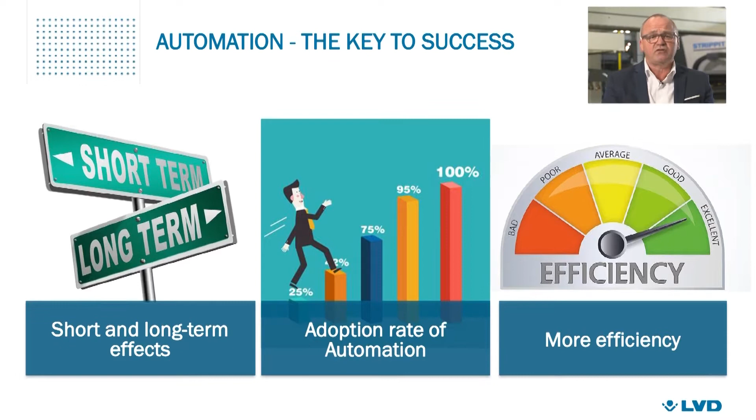Why is flexibility and automation so critical? Let's consider three important points: short and long-term impacts of the corona crisis, and the adoption rate of automation and the need for greater efficiency.

Businesses have been affected by the coronavirus crisis in different ways, with immediate and long-term impacts. The crisis has brought and will continue to bring increasing pressure on stock levels, batch sizes, and delivery times.

Manufacturers will have to more quickly adapt to new and changing circumstances. With some supply chains restricted by lockdowns, companies are pressured to be more flexible in how they operate.

Fabricators will have to quickly increase their capacity in the coming years without hiring more people, adding more equipment, or requiring overtime.

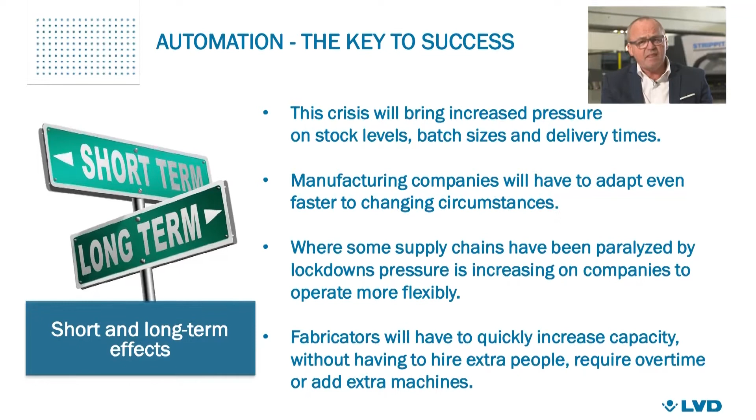Many companies are embracing automation. The crisis has helped to speed up the adoption rate.

38% of entrepreneurs cite automation as a key way to increase the efficiency of machines. Half of metal entrepreneurs agree that automation helps increase flexibility.

Many entrepreneurs, like for example 40% in the Netherlands and 35% in Germany, report that they plan to invest in automation in the future.

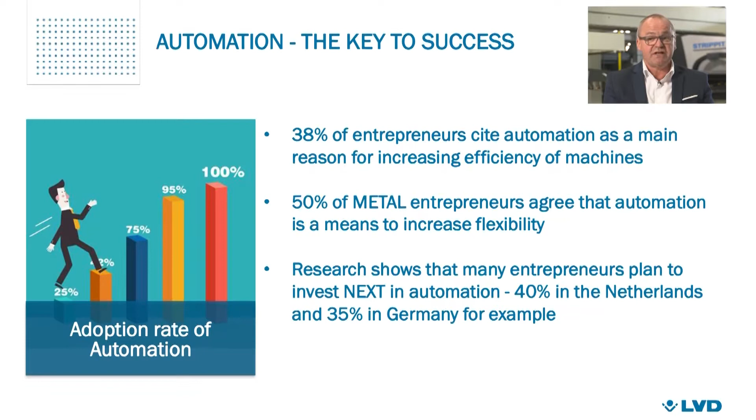Why automate? Automation helps companies get more out of their existing machines without having to invest in new machines and without adding workers.

Automation makes companies more flexible with unmanned production that can quickly be scaled up or down. Automation increases productivity and process flow.

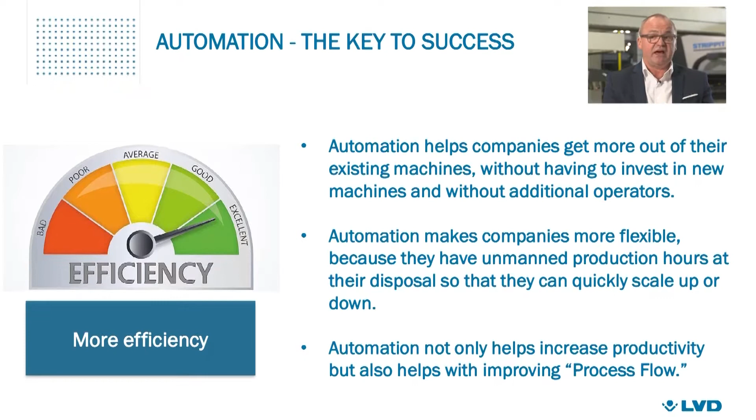How to unlock this key? Manufacturers have to look differently at the layout of their production environment and their process flow. Machine utilization and process flow are equally critical to productivity rates. That's what counts.

Across manufacturing industries and markets, what we have learned is that automation is the key to better process flow and throughput productivity.

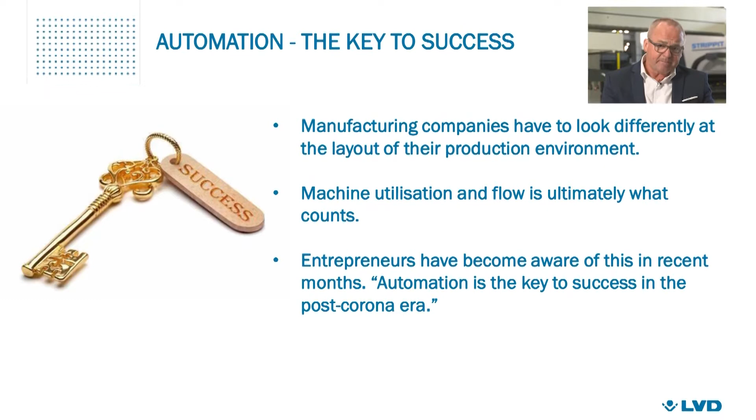Another important factor is how to modernize automation systems and optimize your process flow. It's not just about producing large batches, it's about accelerating your order-to-cash cycle.

Automation reduces the cost per part, and automation also reduces the lead time.

Modern automation systems help optimize process flow in three key ways. The first is they improve the man-machine relationship. The second, they allow you to combine existing and new machines. And the third is they open the door to more creative solutions for manufacturers.

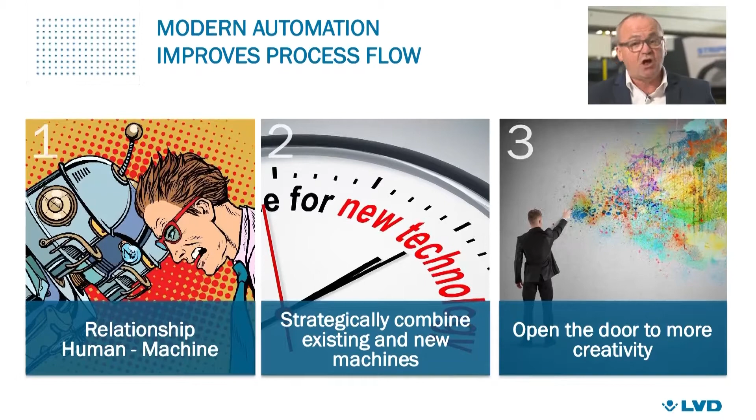The level of automation defines the state-of-the-art factory. Many tasks can be completed without human intervention, reassigning operators to new or different tasks so that they can add more value.

For example, a worker can be retrained to oversee the operation of the system or to monitor the process and make decisions from the data.

Intuitive user interface technology makes this retraining easily possible.

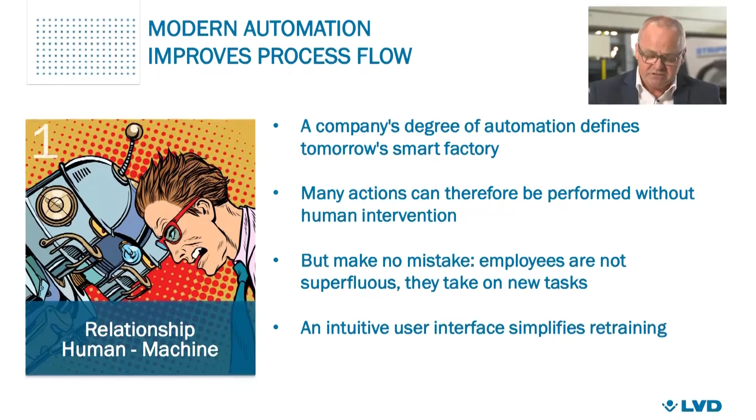Evolving production systems is an important way to create a successful smart factory. Machines that can be expanded and combined in a modular way help you reach a higher level of operation and efficiency.

Modular automation solutions offer enormous flexibility and a guarantee that they will be able to respond to changing requirements.

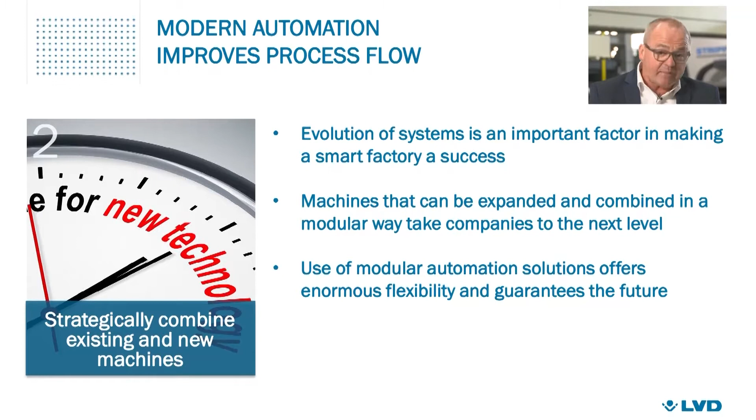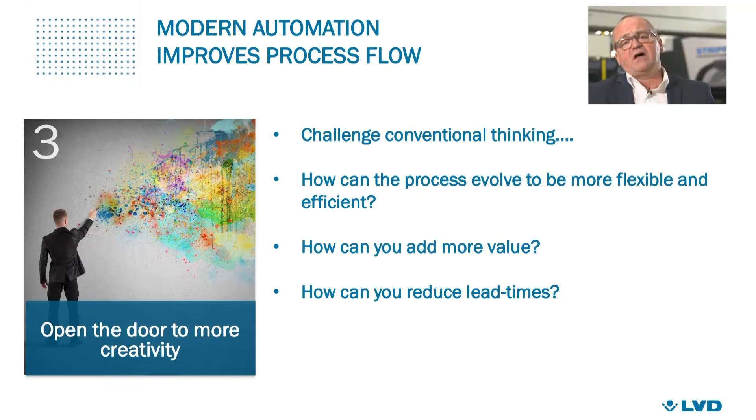Challenge conventional thinking. Three questions: How can the process evolve to be more flexible and efficient? How can you add more value? And how can you reduce lead times?

To succeed with automation, it's all about adding value to the part: punching, forming, tapping, and bending. It's not just about production, it's more about flexible productivity and flow.

How can automation play a part in your company's evolution to remain competitive? Ask yourself, what will your next punch press be able to do?

To realize success with your next punch press, you need to look at 3 things: adding value, flexibility in production, and process flow.

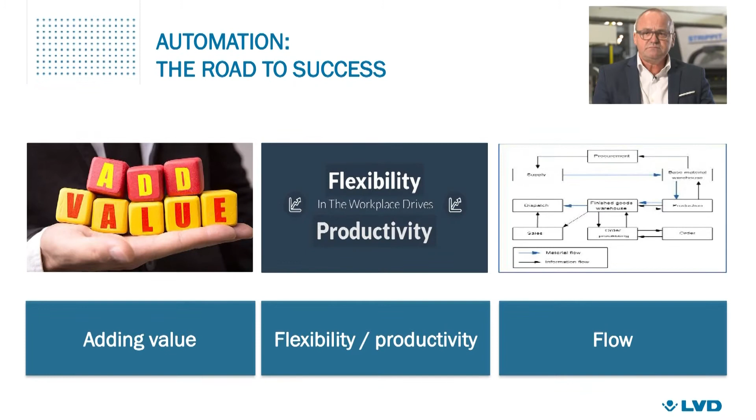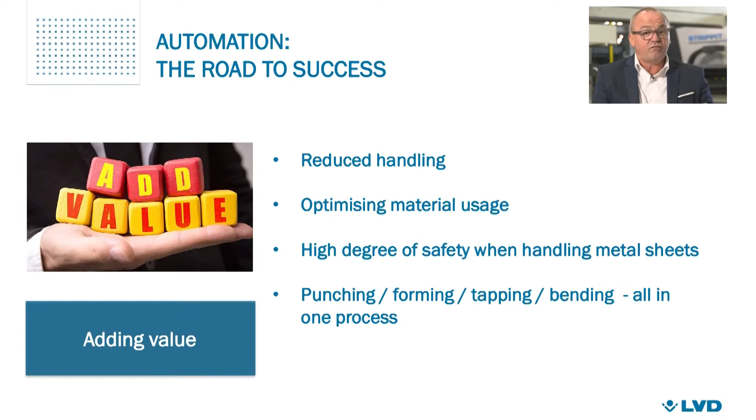Adding value involves reducing material handling, optimizing material usage, making it easy and safe to load and unload material, and having a more capable punching process able to perform multiple operations like punching, forming, tapping, bending, and automation.

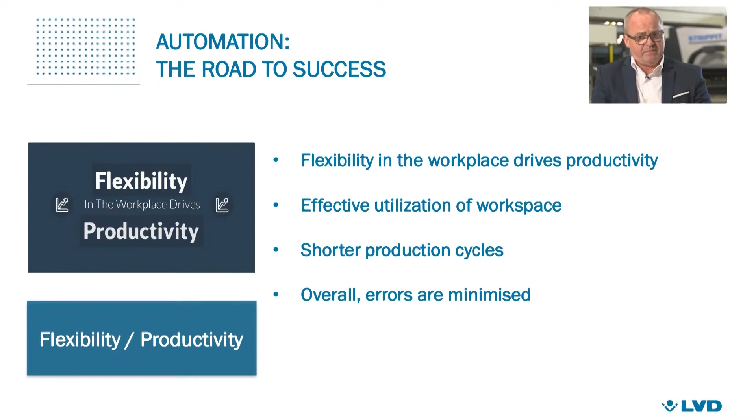A flexible punch press is key because it drives productivity. It reduces lead times and allows you to do more on one machine, so you maximize use of floor space. It reduces production cycle time and minimizes errors.

Process flow is equally important because flexibility of the automation system is key to optimizing the flow. The flow is key to ensuring you can meet delivery times and achieve optimal cost per part.

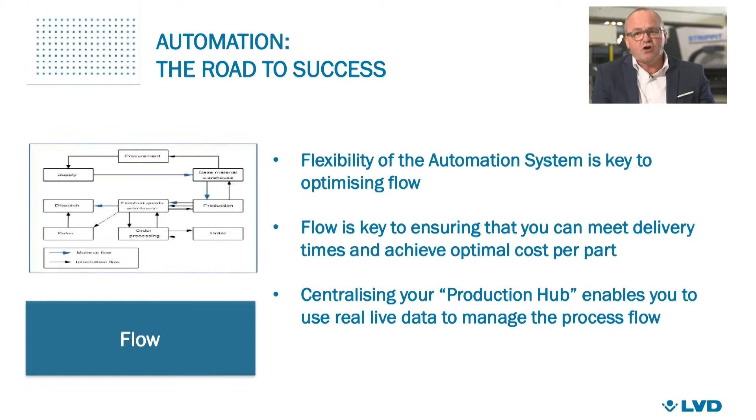Centralizing your production hub enables you to use real live data to manage the process flow. The key is modular solutions with a wide range of possibilities. Modularity is the key to flexibility.

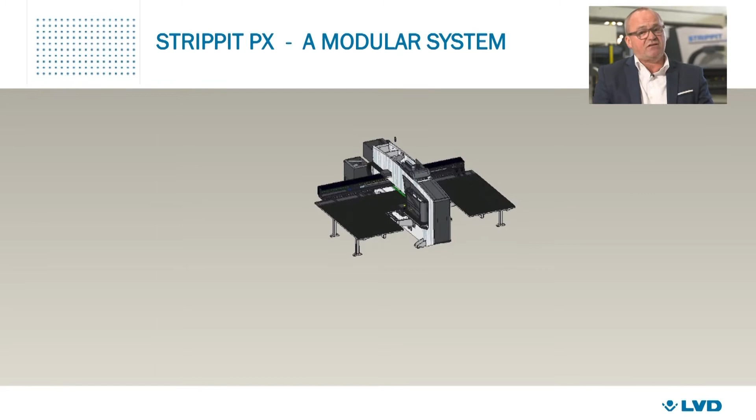An important factor is to start with a core machine that has the process to add value to the part. The FAP flexible automation system is designed especially for this punch press.

Some of the key points are ergonomical design, so there is no physical requirement by the operator. It provides unattended loading of material, unloading of the skeleton, and sorting of the parts. The modular design allows it to be expanded up to 4 meters.

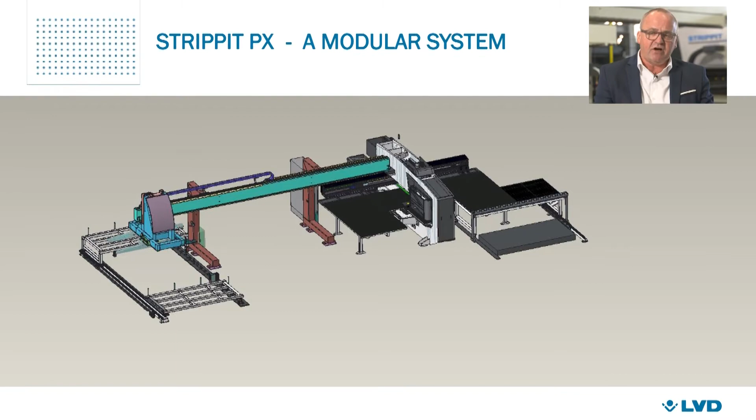The FAP uses a shuttle table for loading material, as you can see on the left side of the slide. There are shuttles with loading tables and also shuttles for sorting and stacking.

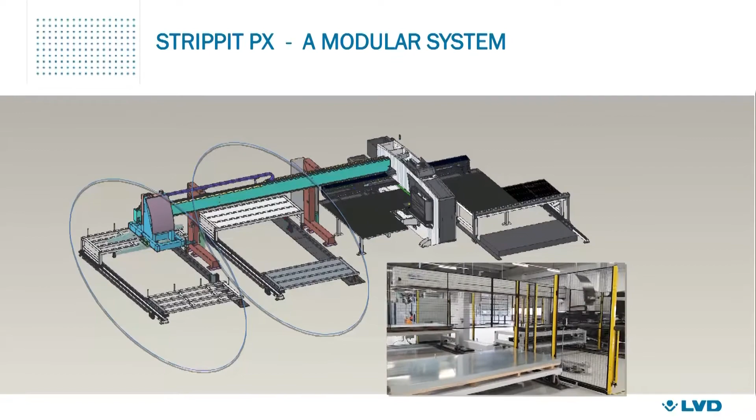Using the FAP will increase the machine utilization rate for a day and night shift up to 50%.

It allows connections to tower automation for input stations or to warehouse automation for a more complete solution. Custom-made pick and sort pallets are also possible.

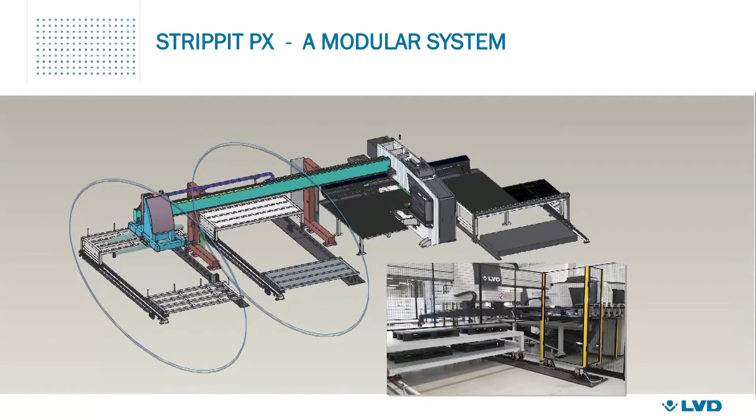A compact tower is another modular automation solution. It can be loaded with several different types of material, different material thicknesses, and can store back the finished sheets from inside the system.

This can be the first step towards unmanned production. It's also possible to combine an FAP system with a compact tower. The sorting footprint will be much larger and can be customized.

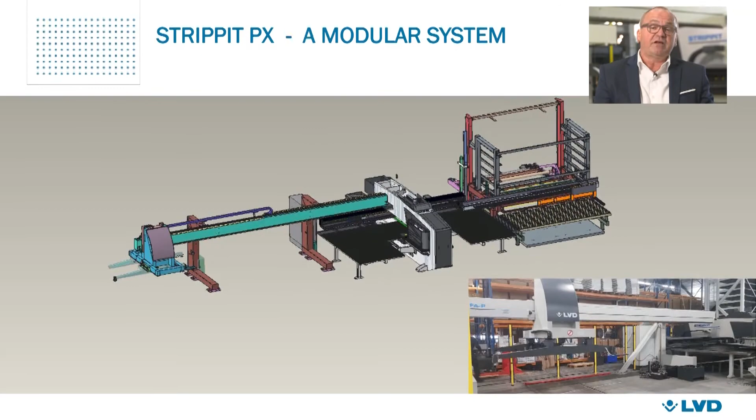Another automation solution is expanding tool storage. A tool storage system will increase the productivity of the punching machine. This extended tool magazine provides additional tool capacity of more than 40 tools.

It uses a carousel to house the tools, which are positioned automatically in the machine. The ETM provides quick access to several tools, which are always ready in the production cycle.

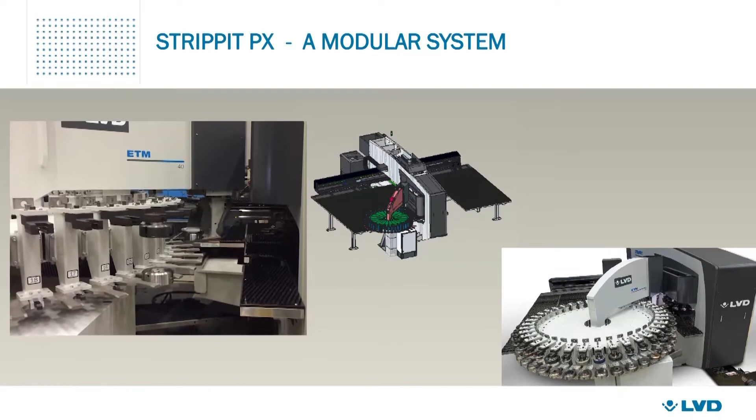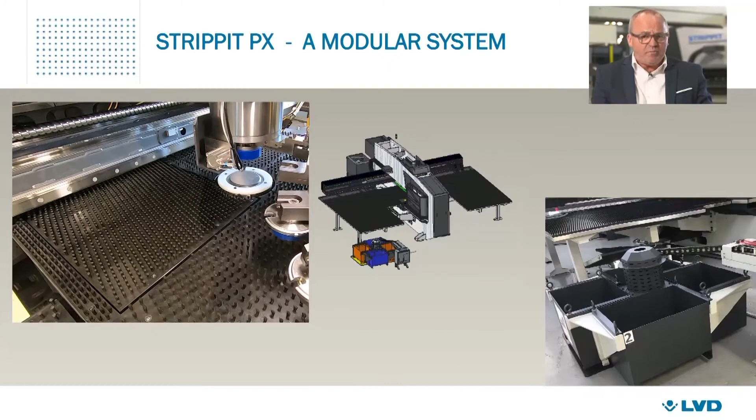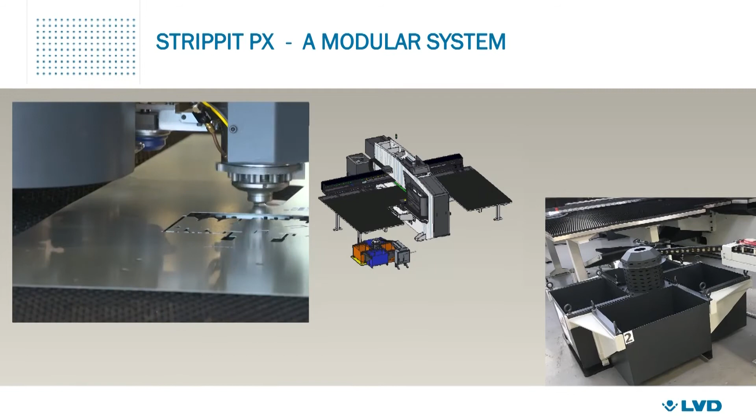For increased productivity, there is also the option for parts sorting. Small parts that fall through the punch press drop door can be automatically sorted by a bin sort. Sorting takes place while the machine is operating, making the entire system more productive.

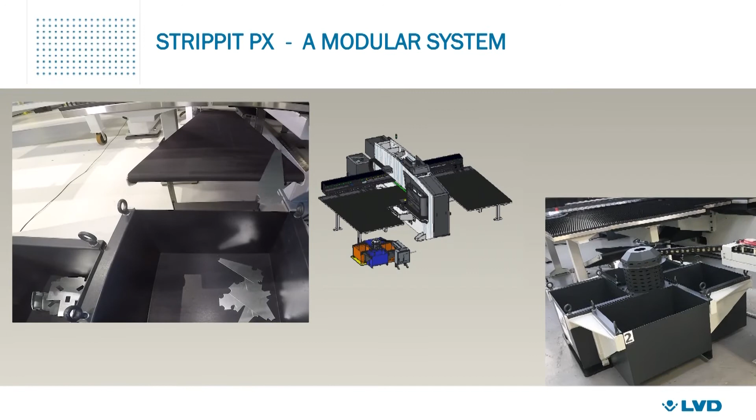Bin sort is comprised of 4 programmable bins that are arranged in a carousel. Bin selection is made by the operator at the control based on the job being processed.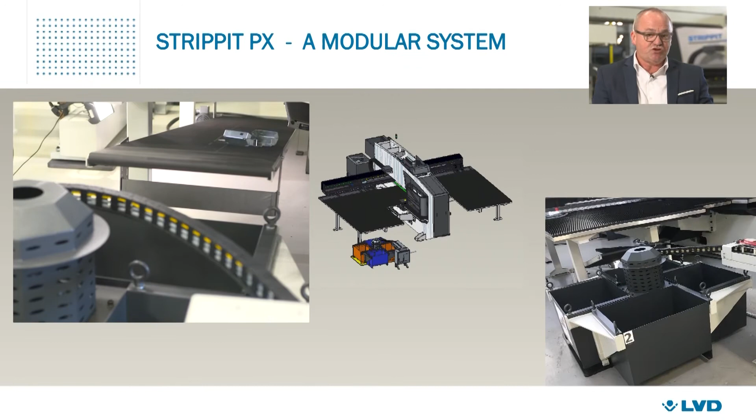Let's now have a closer look at our PX with FA-P and tower automation system. The tower automation system, or TAS, with FA-P is available for sheet sizes up to 3 by 1.5 meters.

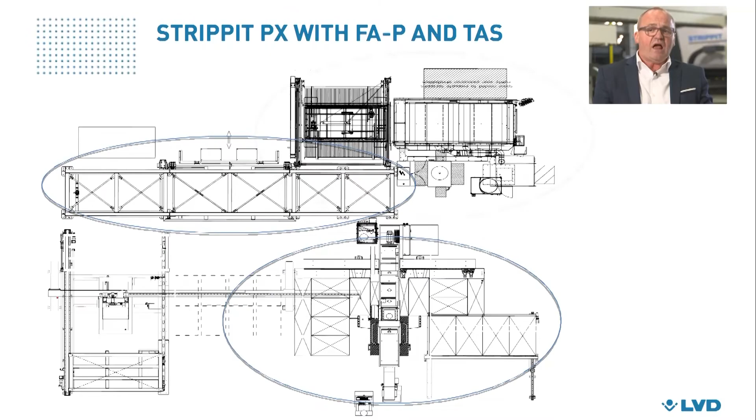The TAS has a modular design to build any of several configurations with additional machines. Here, in this example, there are 2 machines connected to one TAS system, one on the front and one on the back. This machine configuration is set up at our XP center in Belgium.

The TAS is, in turn, connected to the FA-P. Sheets are automatically loaded on the punch press. This is handled not with a shuttle system, but through a direct connection to the tower automation system.